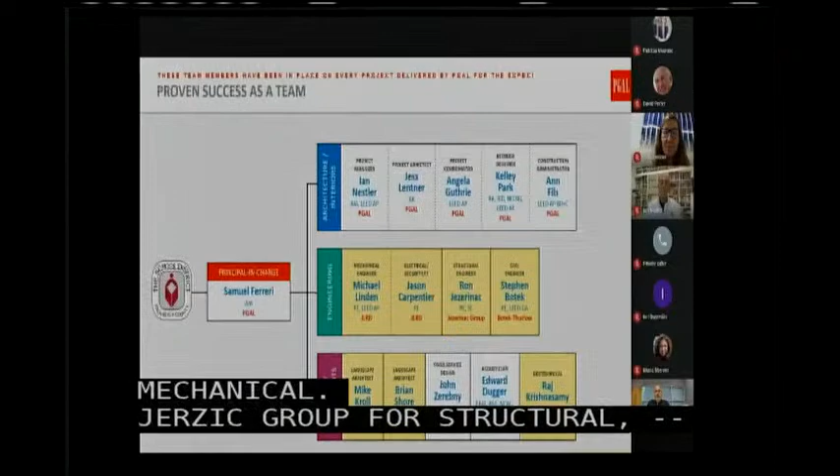The importance of this team, and I'll introduce their names in a second, is that it's the same team that's coming off of the Addison Mizner project, and we'll tell you a little bit more how similar that project is. We've got JLRD for mechanical, Jezerinac Group for structural, Botek Thurlow for civil, Miller Lake for landscape, Jack's Design for kitchen, Ed Dugger and Associates for acoustical, and geotechnical is Tierra, South Florida.

So from our standpoint, we try to stay on top of the educational trends, and we see 4 big things in elementary education that are changing. First of all, we know the future will bring change, and it's going to be designed for flexibility, and we're going to talk a little bit more about that.

Number 2 is student safety, reorganizing the existing Grove Park and planning the school for the utmost safety of students and staff. We also know that students today learn differently. They're digital natives. They come to school with computer skills that myself and others on the selection committee probably never had the opportunity to have. And finally, the pandemic and post-pandemic, how will it impact student interaction?

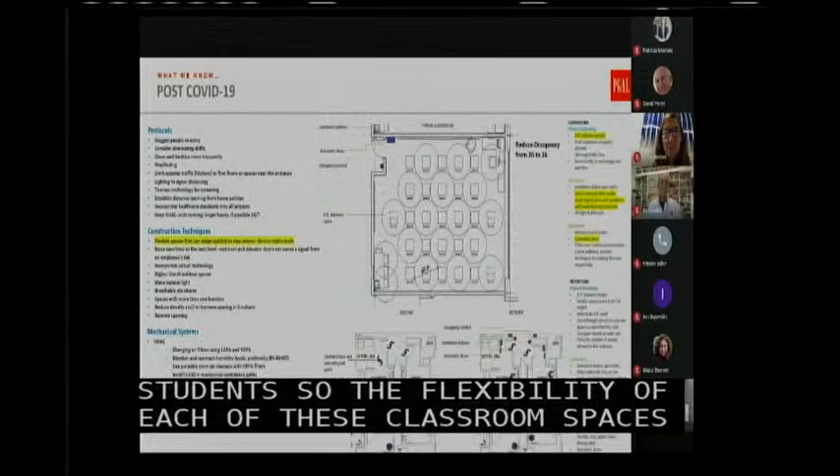Then there's the circulation spaces, the restrooms — how do you basically social distance in all the spaces in the school? And then down to sanitation and also operationally, the mechanical systems, the filtration systems. Those are all things that we know you are doing, but we need to make sure that we do the best job in the design to make those work well.

So now Jess, our project architect, is going to talk a little bit about opportunities and constraints in your existing site.

Hello, everyone. After reviewing all the data that you provided us with, we created this diagram showing some of the opportunities and constraints that we see as being the most impactful on the school campus modernization project.

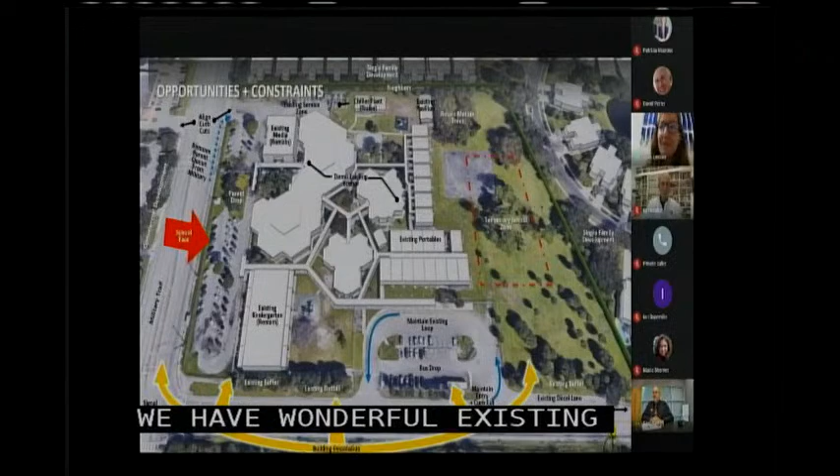First is the neighborhood surroundings. We have a great opportunity to provide a defining Grove Park Elementary face to Military Trail and a dynamic secondary face to Investment Lane. We have some wonderful existing trees and could improve our perimeter buffers to provide a safe and secure campus that's friendly to the community, to the city, and to the densely sited residential neighbors.

Second, the Castaldi analysis. We have the existing media center and kindergarten classroom buildings slated to remain, which we feel could be very strong starts to a modernized design, and we'll present our thoughts on that in a few slides. We also see the potential to work with the Department of Education to open up our site usage and get approval for those buildings to be removed.

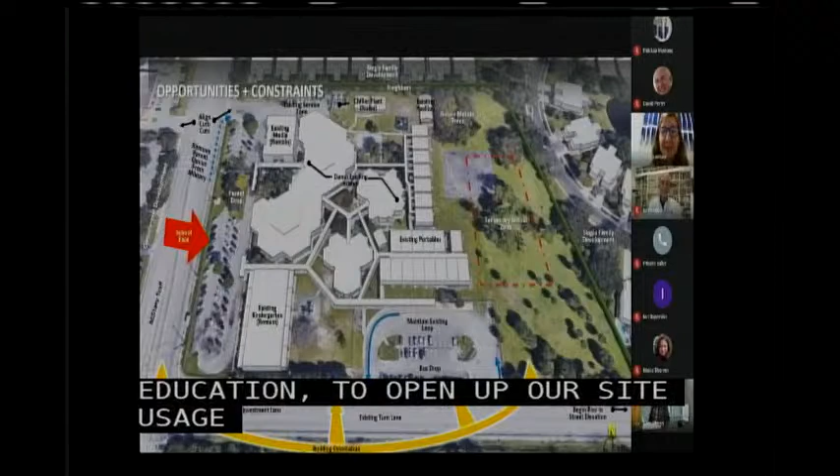On Addison Mizner, our Castaldi process lasted 3 months' time, during which I spearheaded 2 simultaneous design approaches — one keeping the existing structures and one where all would be demolished. We were ultimately able to deliver the construction documents for a fully modernized campus on schedule, and we're confident that we could provide that level of service to the district again for Grove Park.

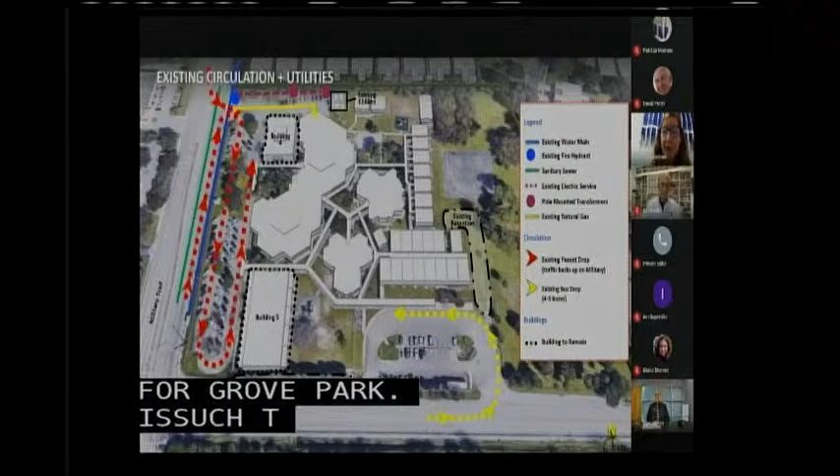Finally, an opportunity to move to a holding school off-site — should that become unavailable, our analysis suggests that the site could support supplementation of the existing portables such that students could remain on campus, with the added benefit that the existing traffic patterns could be greatly improved.

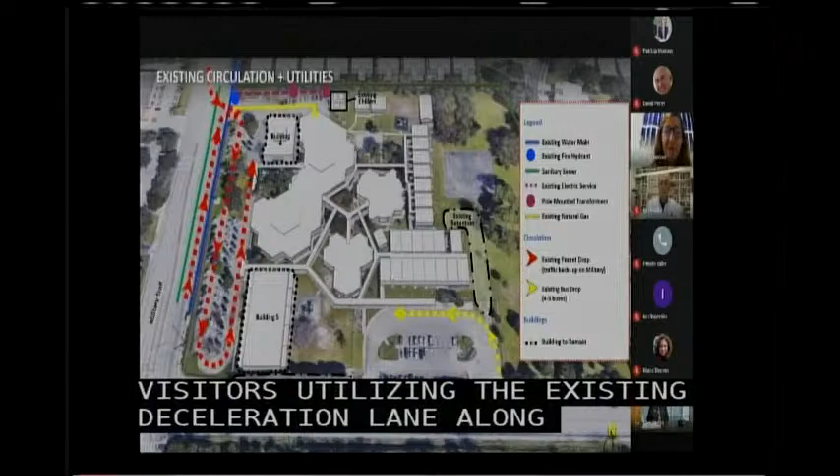Currently, the buses drop off at Investment and parents at Military, resulting in some off-site traffic issues compounded by the intersection. We would like to propose accommodating the 4 to 5 school buses on a service drive up by the Northwest via Military, with parents and visitors utilizing the existing deceleration lane along Investment, along with smarter, more efficient building layout to completely alleviate the traffic buildup and transition to completely on-site stacking.

And this coincides well with our intent to orient the new buildings with canopy and courtyards to minimize heat gain to classrooms and to common spaces.

For the utilities, the majority of the existing services and easements are coming in off of the northwest corner. We would improve the service area and chiller yards to minimize the impact on those neighboring residents to the north and improve accessibility for emergency responders.

Additionally, we would be able to work with the existing portable and relocatable utility connections such that adequate service would be provided should an on-site holding school be required.

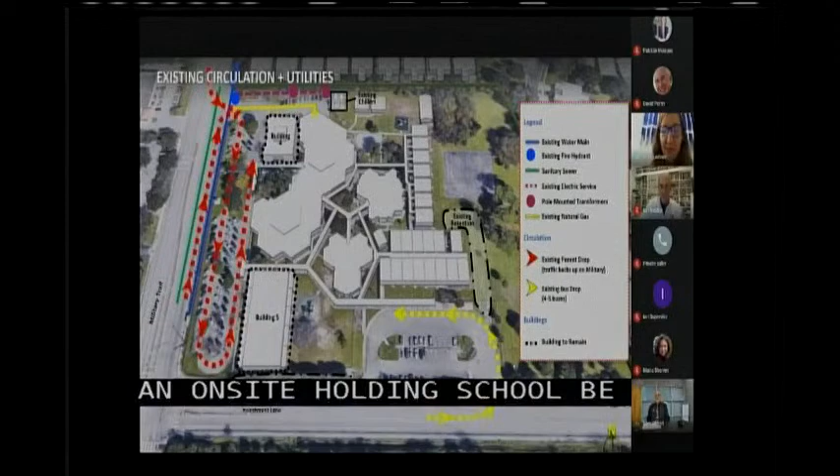And now Ian Nestler, as the project manager, will present on the specifics of the design.

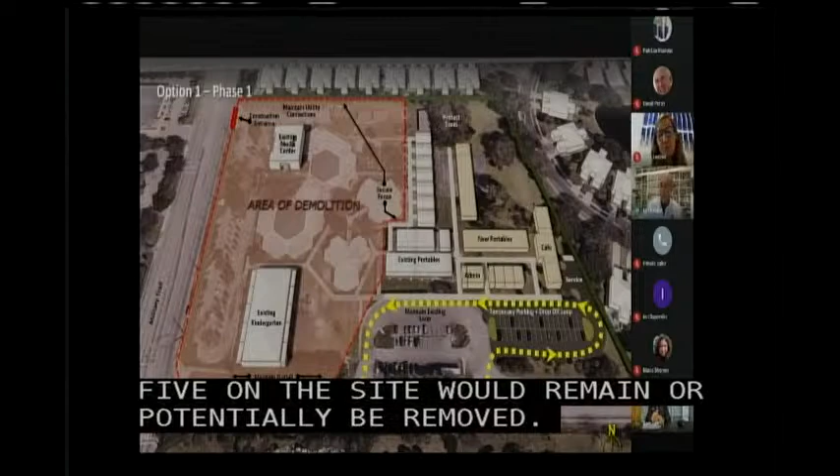As Jess mentioned, we just came off Addison, where we went through a dual path for quite a while while Castaldi was being done. We wanted to look at the best and worst case scenarios, whether the existing media center and kindergarten, buildings 4 and 5 on the site, would remain or could potentially be removed. In the first case, we're looking at two different options: one where they'd remain, one where they'd be removed.

This gives you a sense of our process, not necessarily the final results, but we wanted to take you through it. Each option would have a few phases: the first summer of work, construction during the school year, and the final phase during the last summer to open up.

In phase one, we would have demolition. We could bring in a new portable component to supplement the existing portables on campus so you don't have to go off-site for a holding school. We can put temporary parking and a drop-off loop in place to accommodate circulation needed during construction. The construction entrance would be up on Military, and we'd maintain all utility connections, extending those as necessary for the new school.

In the second phase, we would construct the new school, renovate the existing media center and kindergarten, and add a cafeteria and the administration components, while keeping a secure and safe fence line between construction activities and the portable school operating during that period. All circulation would happen on Investment Lane at that point.

In the final phase, we would remove the portables and reconfigure the final parking lot to provide the parking necessary for the campus, including the required 75 spaces - we're showing 80 spaces here. 975 linear feet is required for queuing; in this case we're showing 1,000 feet, a little over. Retention of about 1.5 acres is necessary, and we have that shown with plenty of room for the play field, play courts, and covered play area.

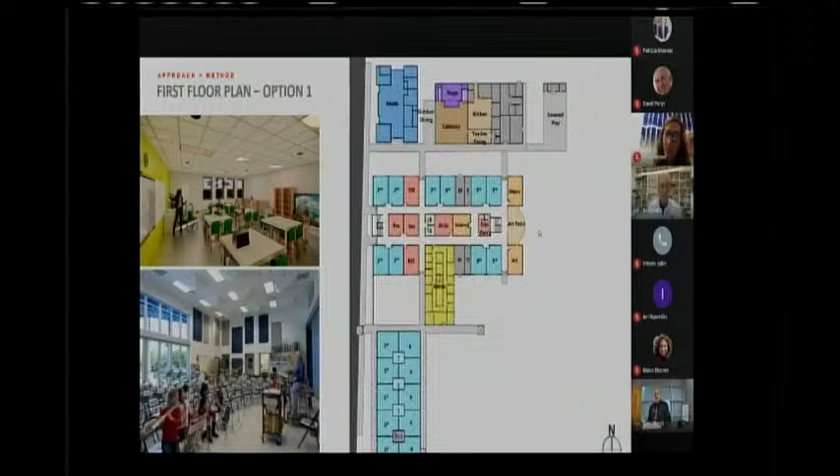A view from the second floor plan stacks on the first. You can see on the left some images of the spaces we'd be creating within the building.

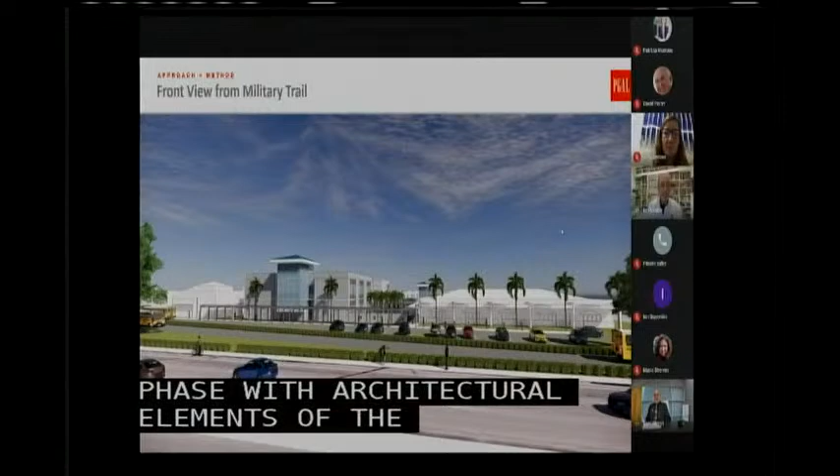Then a view from Military Trail back at the new school. The existing buildings are in white on the right and the left, and the new construction is in the center, providing a wonderful face. We've taken architectural elements of the existing buildings, which is the low sloped hip roof, and used that as a tower element, both on the main entry feature to the new building, as well as towers that signify where the admin is.

Then the next option would be if we were able to get Castaldi to agree with our thinking that maybe the media center and kindergarten building should come down. As Jess mentioned, we had done this with a dual or simultaneous path of design for both options, and we kept both options going until we received the final word on the Castaldi and were able to go in a final direction.

So in this case, we would take down all the buildings on the site. The new portable component would be the same, and the new loop and drop-off would be the same for phase one. For phase two, we would then construct the new school.

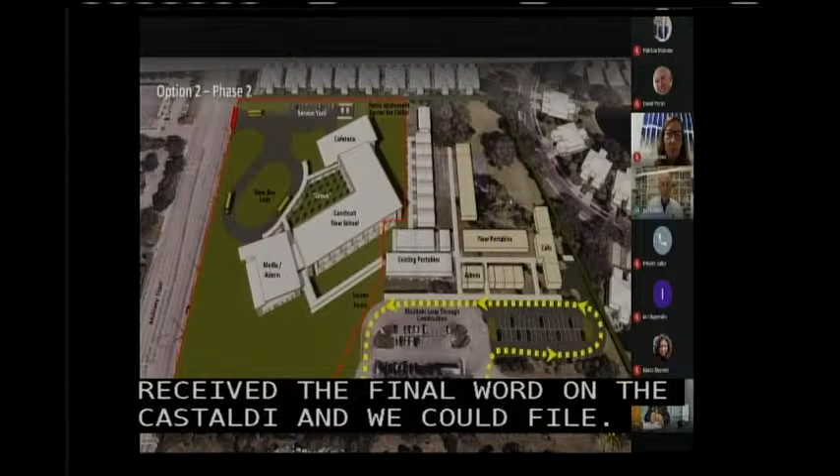In this particular case, because we've removed the existing media center and kindergarten and those buildings, we're able to provide a much more compact, efficient, and secure layout for the school, providing a little more open space to the south. Here we were defining the potential for maybe a grove park, or a grove of trees in the center of a little courtyard for the school, as a gesture to the name of the campus.

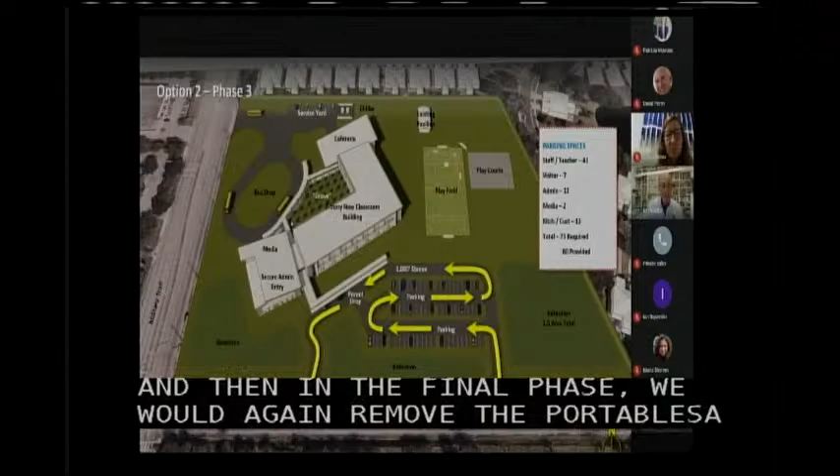And then in the final phase, we would again remove the portables, open it up, and provide the required parking—again, more than 75 spaces. Queuing in this case would be over 1,000 feet when only 975 is required. The circulation would work very well, coming in either from the bus drop or the parent drop from the south or north into a secure area where the admin is.

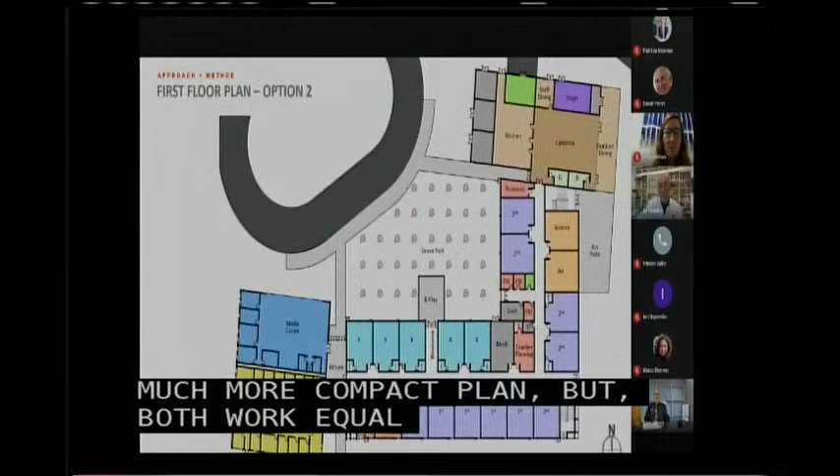And this plan, you can see, would work very well—again, a much more compact plan, but both work equally as well. We've got the correct number of classrooms for each grade on each level, basically 5 classrooms for K through 5, with the primary grades on the ground floor, and on the second floor we would have 3rd through 5th.

A view of this school would then take us, shot here again from Military looking back. You can see the grove of trees there in the middle behind the bus loop, and the media center off to the right, with the 2-story classroom building in the center.

And now I'd like to speak a little bit about the schedule and then pass it off on the budget. So the schedule would be basically the same for both school constructions. Our intent would be to accelerate our activities during the design and documentation phases to be complete in June of 2021.

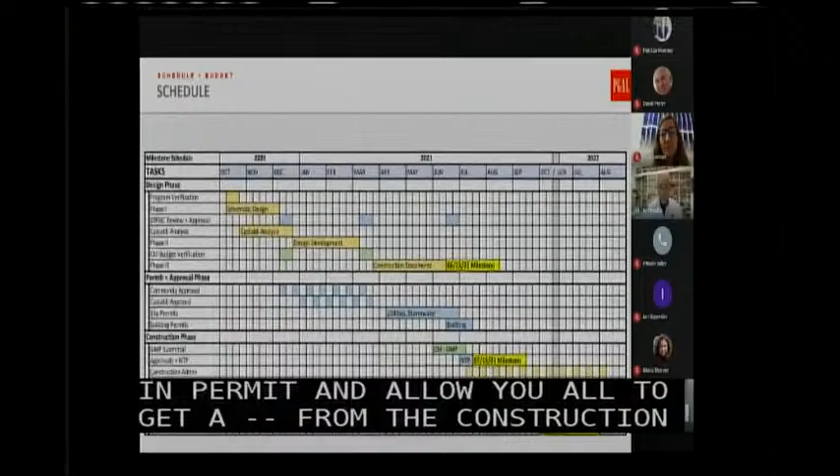And that would allow us to get in for permit and allow you all to get a GMP from the construction manager and actually start site work in June and go start construction in July. So you can see a milestone there of 6/15 for us to be done and 7/15 for you—or the CM—to start construction on the site.

We'd have a full 13 months for construction, with the first summer being the demo and getting the portables in place. The construction could take place very simply, and then you'd be in a position to open up easily during the second summer, with punch out, close out, and commissioning by 8/15 of '22.

So that only allows us to do a combined two-path design during the design development and schematic design phases, as you can see with the Castaldi analysis, and then 3 months of approval for that, as well as community engagement—the kind of meetings we've had on Addison Meisner would be basically a repeat of the process we just went through. It has worked out beautifully, and we're under construction with that one, and we're very excited about that.

So let me now turn it over to Sam so he can talk a little bit about the budget. Thank you, Ian. We've looked at the budget from both leaving buildings 4 and 5, and clearing the whole site. We've got relevant and basically new cost information based on the Addison Meisner GMP, which is back to May.

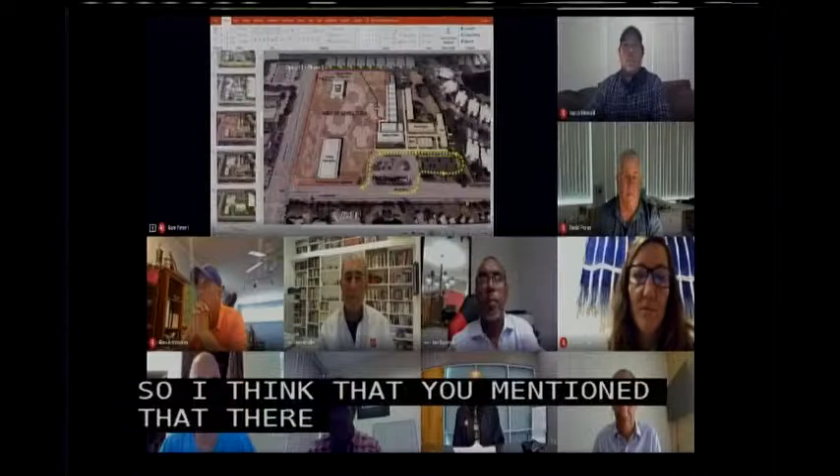Just one question with regards to the proposed plan you showed. You're going to move the vehicular access off of Military to Investment Lane, because I think you mentioned there was some traffic issues for vehicular entrance and exiting off of Military.

Investment Lane, I mean, obviously is a smaller thoroughfare, but I was wondering, with regards to a left turn lane on Investment, since it seems like maybe a two-lane structure with an interior turn lane, do you think there's enough queuing, or any issues with traffic coming from west to east to make that left turn versus traffic going east to west? Do you think there'd be a conflict that may back traffic up to Military Trail? I'm just curious, because I didn't know how many people actually drive the kids to school versus buses.

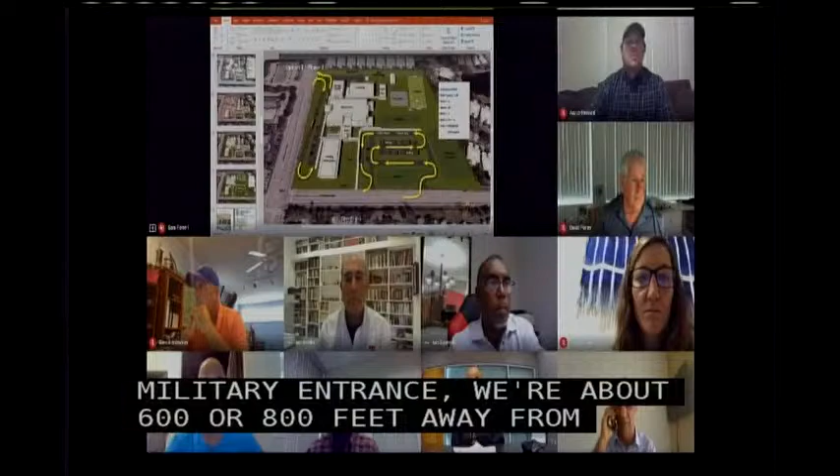Okay, so because we've been in COVID, we weren't able to go and observe for the last month, but our civil engineers have reviewed this. We believe there's adequate, well, first of all, we're getting basically all the stacking onto the site, over 1,000 feet, where right now there is no stacking from the military entrance. We're also about 600 or 800 feet away from the intersection of Military and Investment Lane. And there's also a turn lane on Investment Lane into the school, which the buses are currently using.

And it's a long turn lane. And then there's also a distance to the overpass - there's an overpass over 95 on Investment Lane. So there's a clear path. And actually, we've observed the traffic patterns, not school related, and Investment Lane is definitely not as busy a street as Military Trail. So we feel comfortable that this is a better solution, and it'll be very difficult to solve the solution on Military Trail.

We also have a staff member, our marketing coordinator, who is an alumnus of Grove Park Elementary. That was before Investment Lane was built through, but she noticed there's been a traffic problem here for years at this school, and we're hoping to solve that.

Understood. Just one other quick question. Could you put up the site plan with, I guess, those buildings - the kindergarten and media center - that if you didn't have to keep them, you could come up with a different site plan? I know there was one that was angled.

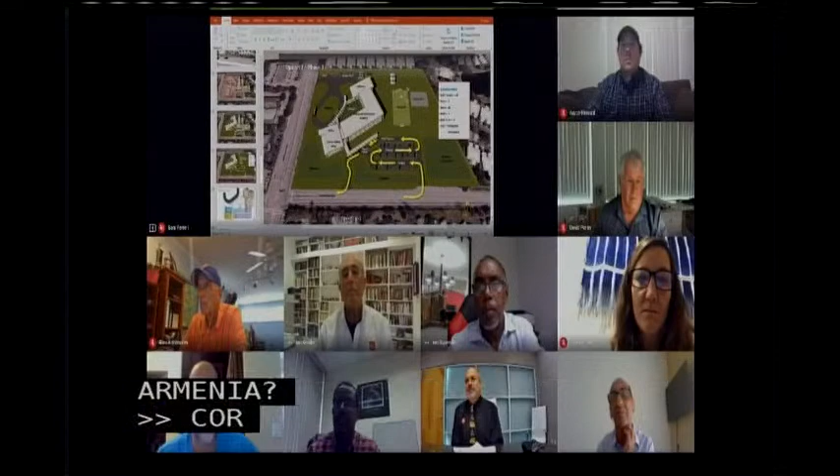Okay, this is the site plan in case you don't have to keep the kindergarten building or media center, correct? Correct, and so this becomes a much more compact building. It gives us more site to work with, so we can get further back away from Military Trail and Investment Lane, for more stacking of buses as well as parents.

The other thing, Michael, on this school is the existing buildings, the kindergarten in particular, has all exterior entries, so it's a building circled by a covered walkway. From a safety and security standpoint, we like bringing the classrooms internal and having that internal security and compactness to the school, if it is possible.

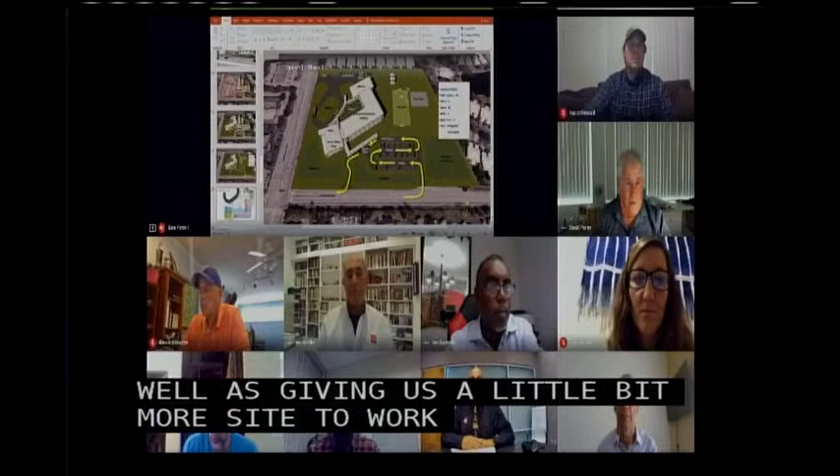That's why we showed basically supplementing the portables that we think we could build on the school. Now, if we could move the students off the site, that's going to help us with the timing, as well as giving us a little bit more site to work with, more relief in terms of getting that traffic off of either Military or Investment Lane. So that would be preferred.

But if we can't do it, we think we can make it work either way. Last question is, the existing school buildings are all one story, aren't they? Yes. So was there any consideration to trying to still work out a plan to keep things one story? Because it looks like both of your schemes go multiple story.

And again, these were just two quick looks on our behalf. Knowing that we might have to keep the kids on the site made it difficult to do a one story. The existing school is like an old pod school, and half the school is portable, so it's way more compact than, or takes up more space than a compact school.

But that's an option we could look at. We just think in terms of security, having an enclosed height two-story solution works best, and we can get all the primary grades on the first floor with all the support spaces that are needed.

Okay, thank you. That's all I have. Thanks, David. Do we have any further questions from committee members for PGAL?

Glenn? Yeah, just to expand on that a little bit, from what I'm seeing, a lot of times when we go to a two-story building, we also have less of a footprint, one roof instead of expansions of roofs and stuff.

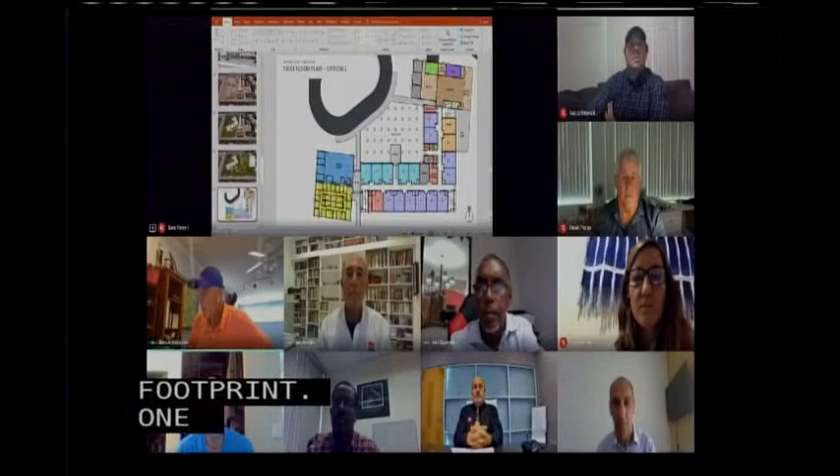Questioning back to kind of circling around where Michael had talked about, are you guys thinking that we're going to need a turn lane or deceleration lane on Military Trail for the buses, since both schemes have buses?

Well, I think I could jump in on this one, Sam. I think the number of buses, 4 to 5 buses that we've been told, is relatively small for this campus, so there may not be a need for a decel lane on Military. And that would be something that we would work out, of course, with the county, with yourselves, to make sure that we have the correct components.

But we've got lots of opportunity and lots of room once we move buses to the Military Trail side. Okay, that's all I have. Thanks, Glenn. Are there any additional questions from the committee for PGAL?

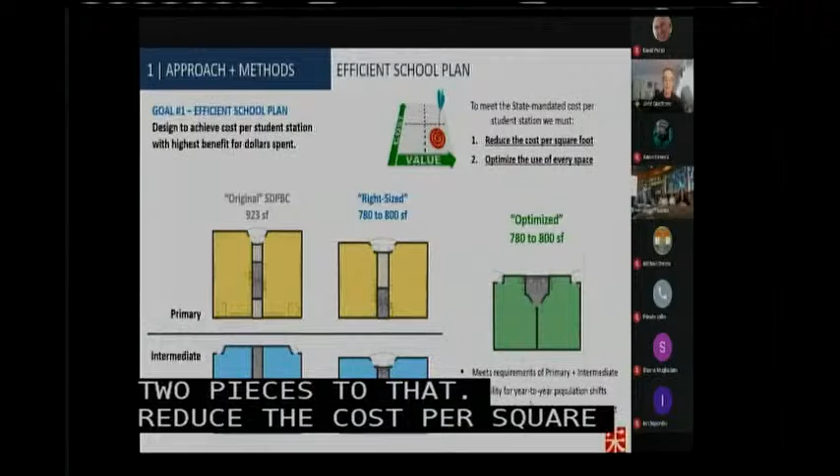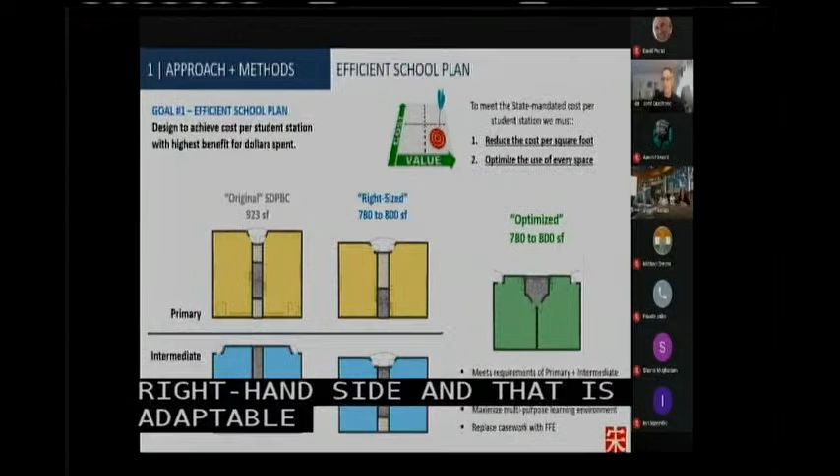We have found in building several schools now that an optimized classroom size of about 800 square feet works very well with all the furniture. We've also developed a universal bathroom configuration via this compact vestibule that you see on the right-hand side, and that is adaptable either to a primary level restroom configuration or intermediate level restroom configuration.

In terms of energy use intensity, or EUI, there are a number of ways to get there in terms of design strategies, but an average school building has an EUI of 54, and that is an energy use measurement based on a square foot basis annually.

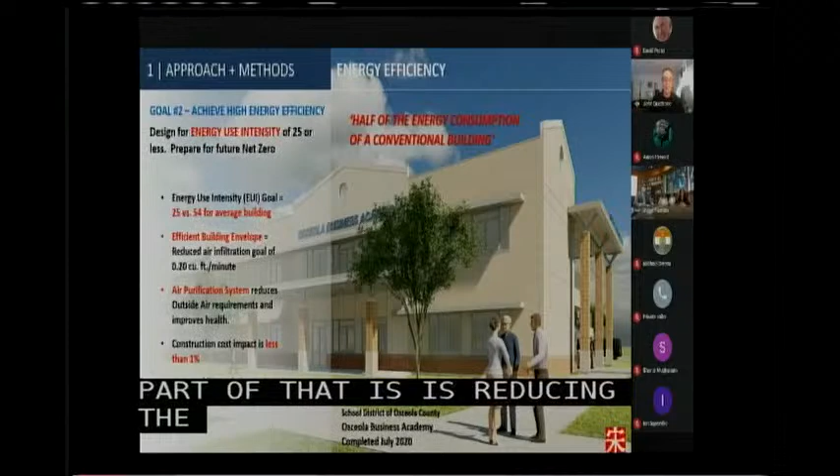We have recently designed a building that will do better than an energy use intensity of 25. Part of that is reducing the air infiltration through a very efficient building envelope, but also the type of glass, the type of insulation. So what this does is set you up in the future to go to net zero, because you've made a very efficient school.

The only component that is missing now is the photovoltaics, so you can decide to do that at some point in the future as the price of that continues to go down.

Next, as a goal, adaptability. Change is the one constant, and the school needs to be designed for flexibility. The way to do that in the classroom setting and all the instructional spaces is to have as few fixed elements and as much movable furniture as possible, so your spaces can truly be multi-use so that you can achieve social distancing within the classroom.

And we know that new products continue to roll out in response to this, including the image you see there of outdoor hand sanitizer stations.

Next, prioritizing security and safety for a functional, safe, and secure campus. We understand that this campus, Grove Park, has a very high percentage of walkers, which we need to prioritize, having safe pedestrian paths throughout the campus and arrival to the campus for those.

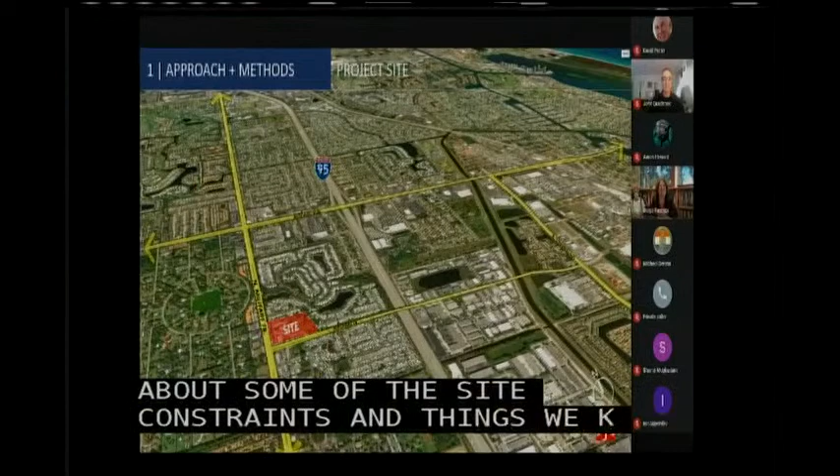We're going to talk next about some of the site constraints. This is giving you an overview of the site in red, with Military Trail to the west and Investment Lane to the south. Analyzing the existing school and its current function, we can see the primary pedestrian paths of the students would be from the west, crossing the road and coming from the north and south on Military Trail into the site.

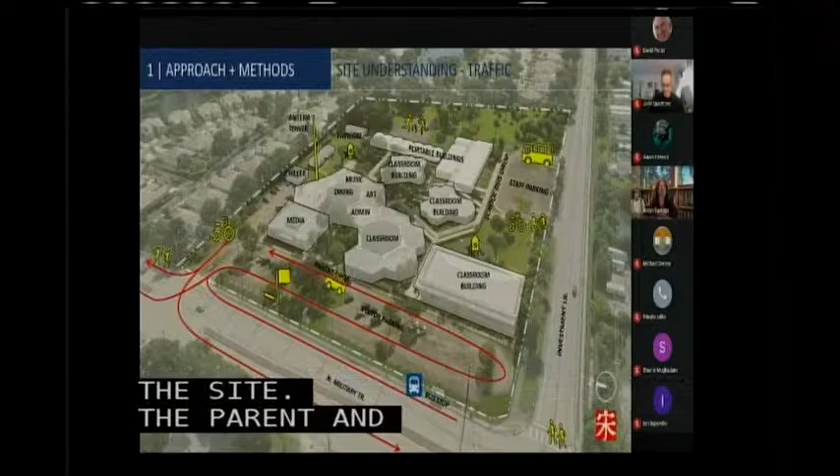The parent and visitor parking loop is currently along Military Trail, and this is somewhat problematic. We do know there's the possibility of a deceleration right turn lane needing to be added along North Military Trail to accommodate that stacking—it's currently not functioning efficiently in that way. The bus drop off is currently off of Investment Lane to the south.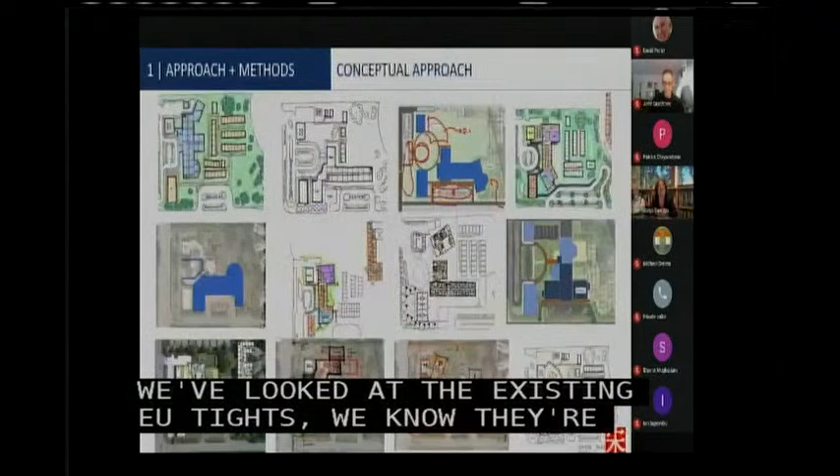We also have delivery to the cafeteria and dining, which is happening at the north end. And we've looked at the existing utilities. We know that they're mostly coming from the north property line with the lift station and water meters in that location. So as we started going through the possible design approaches, we engaged in conversations with our consultants, including our MEP team, our civil engineers, and our traffic engineering, which was key in developing the options you can see on the screen, and developing our final two options that we're going to present momentarily.

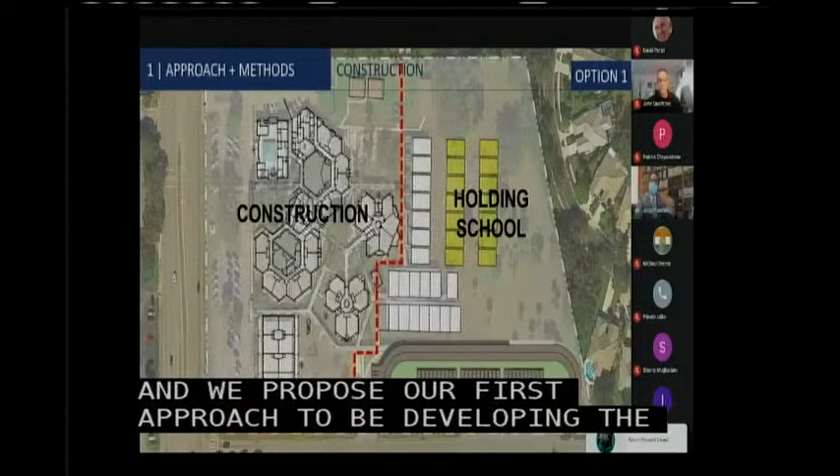So we know our site, we know the existing buildings, and based on this, we proposed our first approach to be developing the holding school as a phase one. That includes the parent drop-off circulation that we are proposing to be changed into the investment lane south of the building. We decided this upon some conversations with our traffic engineer as the best way to relieve the traffic congesting the military trail, and then moving what will be the bus drop-off and staff parking down to the west side of the campus.

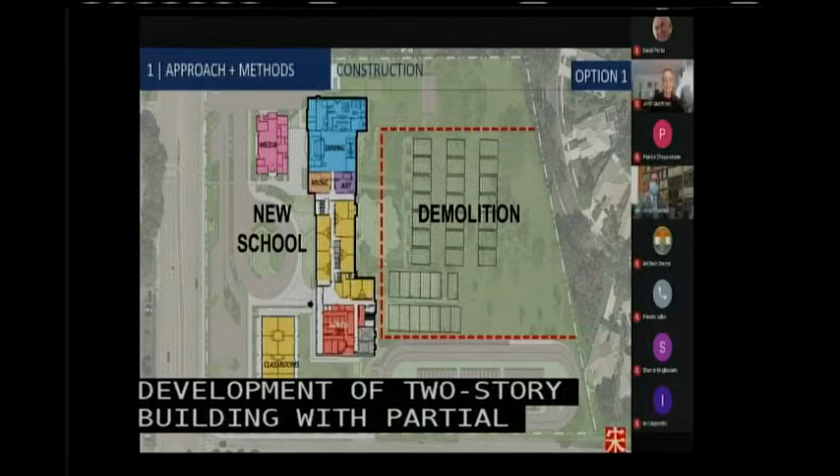After our site is done, our first option proposes the development of a two-story building with a partial one-story area north of the site where the dining, music, and art classrooms will be located. As we know, the budget is a key element. We have proposed to keep the media and classrooms under this option to remain as is, with minor renovations to bring them up to date, including HVAC renovations, some lighting, and some miscellaneous renovations throughout the buildings for this option.

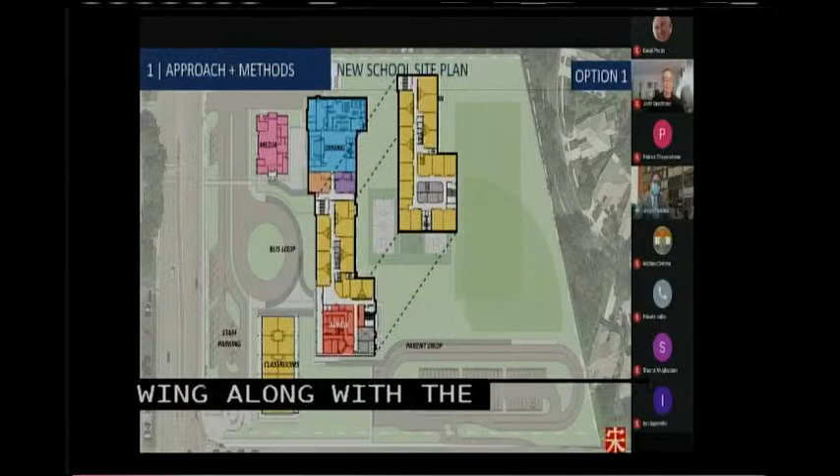When moving into the two-story portion of the building, as you will see on the screen, basically it's the classroom wing along with the administration area down south. Basically what this does is propose an approach that condenses the building and proposes an efficient circulation throughout the building with close monitoring of the admin staff.

In regards to the site, and this is something you will see in both approaches, we are proposing parent drop-off at the south investment lane with the existing deceleration lane, which will actually help the off-site stacking, but we're increasing and bettering the conditions of the on-site stacking by moving almost all of the parents and cars into the site and avoiding further conflicts on the investment lane and/or military road. Then on the west side of the campus, we're proposing a bus loop up to the district standards along with staff parking on that west side of the campus.

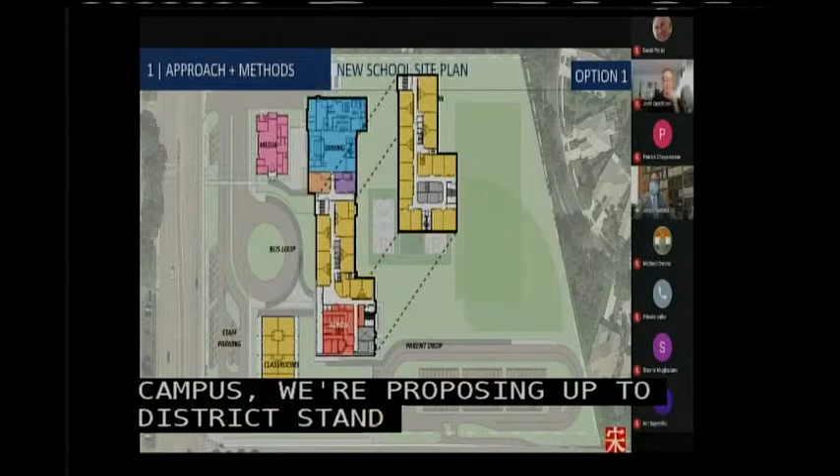One important thing, as Jill mentioned, is the amount of walkers and the pedestrian circulation on the site. Because of that, we're proposing celebrating that corner, that intersection between military and investment, with an entry courtyard for pedestrian access that will connect to the entry zone of the schools and the point of entry on the administration. That's besides the already existing accesses from investment lanes that will also connect to that parent drop-off area.

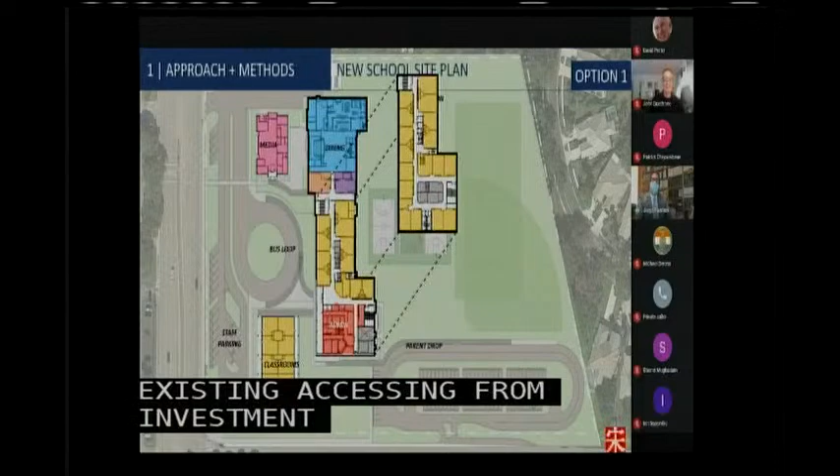So this two-story option, and something you will see similarly on the other one-story option we're going to present, is basically a 63,000 square foot building, which is what we found was doable under the budget that we have for the project. So we're meeting the amount of classrooms needed, and we're meeting the budget the district currently has by first adding the building and bettering the condition of the existing two buildings to remain.

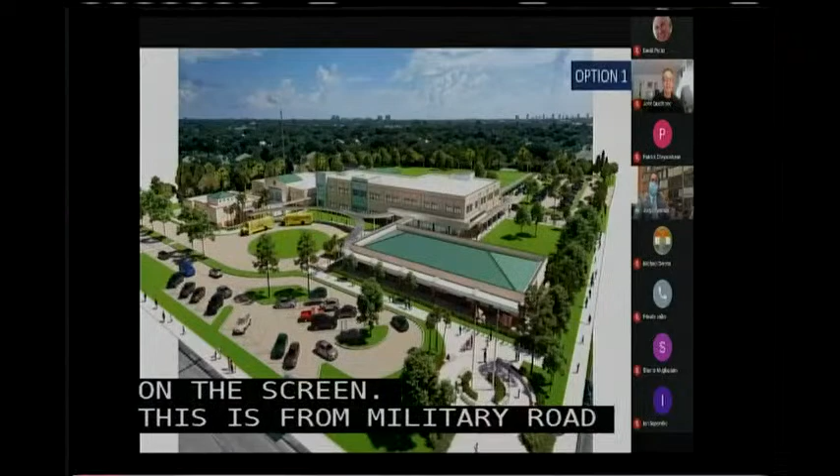Now, moving into the second option, we felt we needed another type of approach that gives you an opportunity to explore the site in a different way. Based on that, going into the holding school portion of the work, we're proposing a phase one construction of the parent drop-off area that will later serve the school, and then having the holding school at the east side of the property.

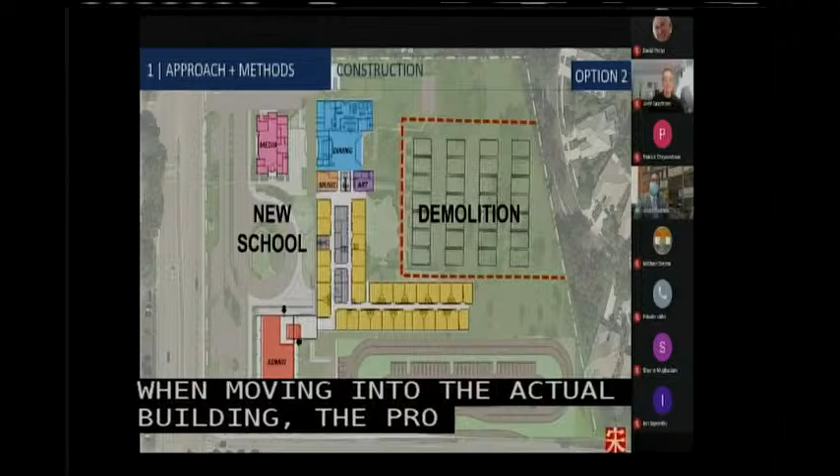When moving into the actual building, the proposed option is a one-story building. As you can see, it works similarly to the other options, but I'll go through the details. The difference is that it's a one-story building that extends further to the east side of the property.

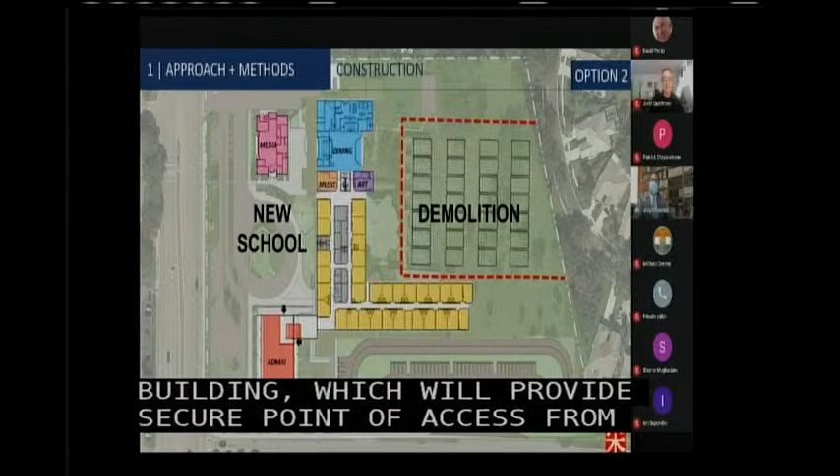Basically, we're putting some limits on that area northeast of the building and securing that for proposed sports areas as well as exterior courtyards for students. One other thing we did in option 2 is propose that the existing building 5, on the south portion, be changed into the administration building, which will provide a secure point of access from both the bus loop and the parent drop-off that will later lead to a lobby connecting to the classroom wing, all through interior spaces.

It's important to say that this option is interchangeable with option 1 — the possibility of having this building renovated to fit this program and have it used as an admin area.

Again, in terms of the program, the north portion of the building will be the dining areas, music and arts. Important to mention is the relationship this creates between the dining and the media, with an exterior courtyard they could use not only for students, but if the school decides to engage, possibly for public use, performances, and so on. All of this will be enclosed within the building's limits, so it will be a secure access.

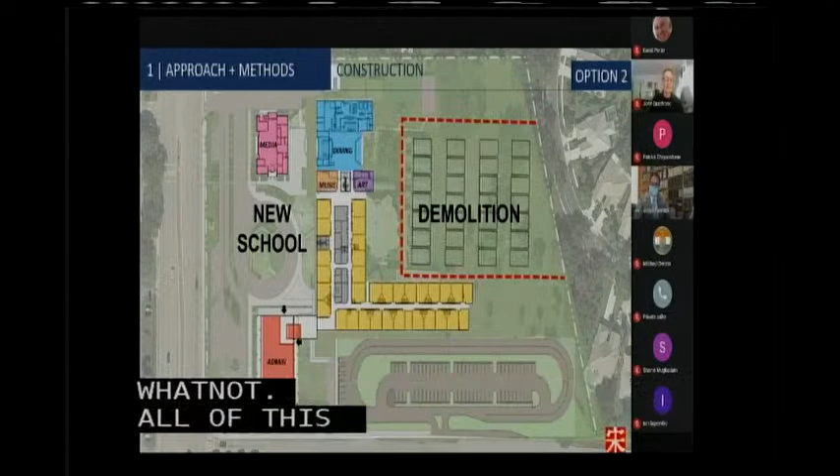Then on the back of the campus, after demolition of the portables, we'll have the sports areas along with some exterior courtyards for students to use. So basically this sums up our option 2.

Here's a view of how that might work within the site and how that might look. We feel we're creating better circulation for the parents, better circulation for the way the buses and staff engage within the site. And very importantly, we're engaging the pedestrian accesses through the development of the courtyard at the intersection between Investment and Military Road. Here are some additional views — this will be from the bus loop to that secure point of entry.

Now moving into the schedule and budget, I'm going to leave you guys with Lila.

Hi everyone. What we did was base a schedule on the dates provided in the RFP, the need for an on-site holding school, and a September board approval. Of course these dates can change and be tweaked, but based on these assumptions we created this schedule, which makes the design package broken up into 3 submission packages.

We'll break it up into phase 1, which would comprise the holding school, that partial site, the development of the parking lot on the south side, and the demolition package for the existing building. This would also allow us to get 2 GMPs for this process, because we would also require a demolition package for phase 2, the new and renovation components.

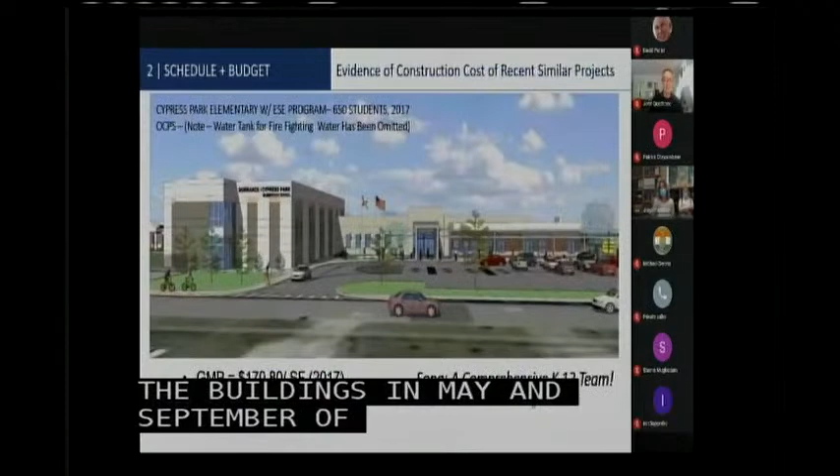So now moving into the budget, we used a few comparables of projects we've done more recently. For example, Cypress Park Elementary School in Orange County, which will be our base for comparison. Similarly, we got some information from our Michigan Avenue Elementary School. The first one was close to our 650 stations; this one has a few more stations, but we came up with the cost per square foot suitable for our project.

As you can see on the screen for our budget, the first option is the comparable. We ended up with Cypress Park at $171 per square foot, but since time has passed, we added an additional 20% for yearly escalation and the location factor for South Florida, which ended up being approximately $205 per square foot. Now, when it comes to our actual project...

Excuse me, Jorge? Yes.

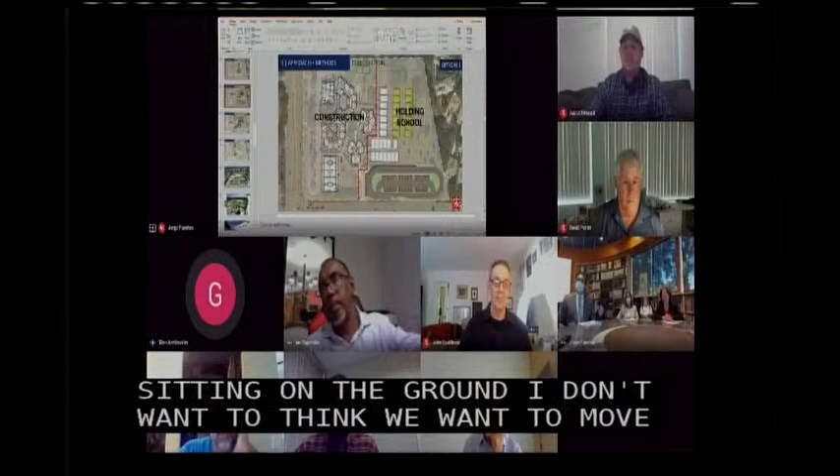Hi, Jill. Hi. I had questions - if you guys can pull up the first rendition that you had up, which I think included leaving the portables as is. My big question is that if we have to keep this as a holding school, which I'm hoping we don't, but if we have to keep this as a holding school and we need to keep costs down, existing portables sitting on ground - I don't want to think that we really want to move those around prior to any construction happening. So your first approach left everything intact, but I think your second approach kind of moves those portables around, which once again adds added cost to us. Am I right in what I was looking at?

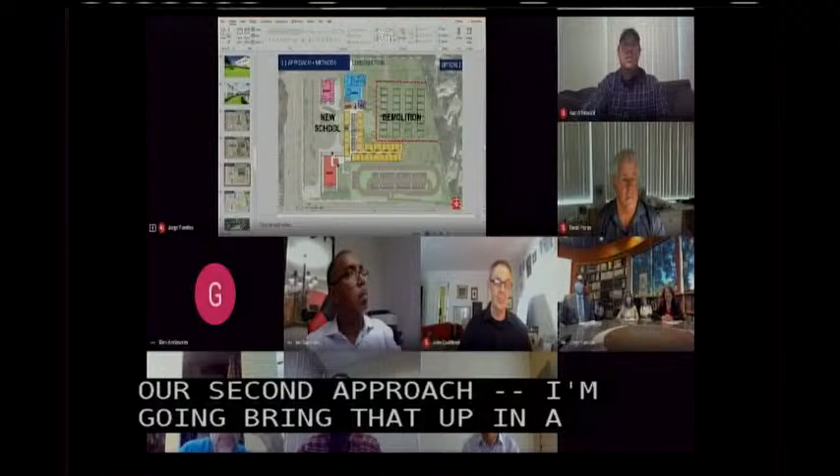Yeah, Glenn, good point. Basically, on our first approach, we do keep all the portables in place and then add the required additional portables for the holding school that's coming into the site, or not. Then our second approach - and I'm going to bring that up to the screen in a minute - it does remove the existing portables at the south. It keeps only one of the lines of portables. One of the reasons we developed this first is because we think this engages the site in different ways than the first option, and there's the possibility of the holding school to be or not to be within the site. So we felt it important to explore not only the capacities of the site, but to give you maybe an option that if the holding school does end up being outside our site, that we have something that can better respond to the site where it belongs.

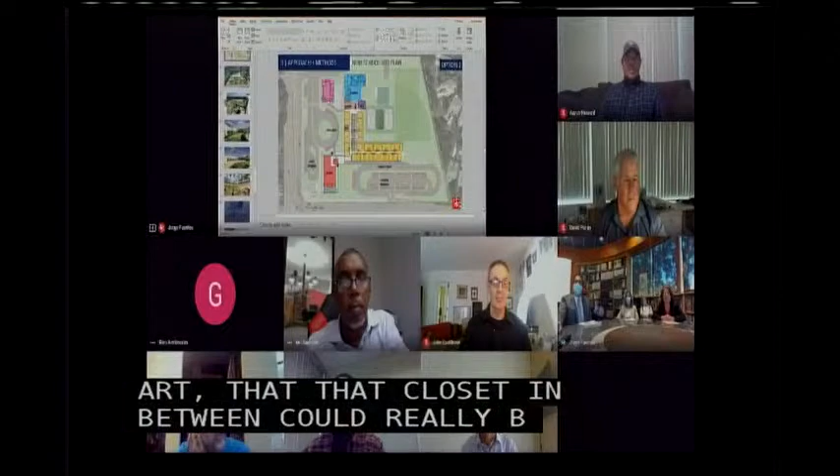Okay. And while you got that one up, I like the fact that you got the admin building over there because that becomes more of a single point of access - the buses coming in, the parents coming in and stuff like that. The only thing I don't really like about it is the media center's kind of sitting out there all by itself, not connected to anything. But that could work in our favor, but as far as students go, to me, it's not a real good option. So we envision actually engaging the media center with the dining and also music and art - that plaza in between could really be developed as a really usable outdoor space serving both media as well as cafeteria, and music and art could flow out into that as well.

As needed. Yeah, I like the plaza. It's just the connectivity of that building sitting out there by itself. Everything else is going to be undercover, but that's the only building we'd have to go outside of. But I like portions of it, just having that building out there is a little scary to me.

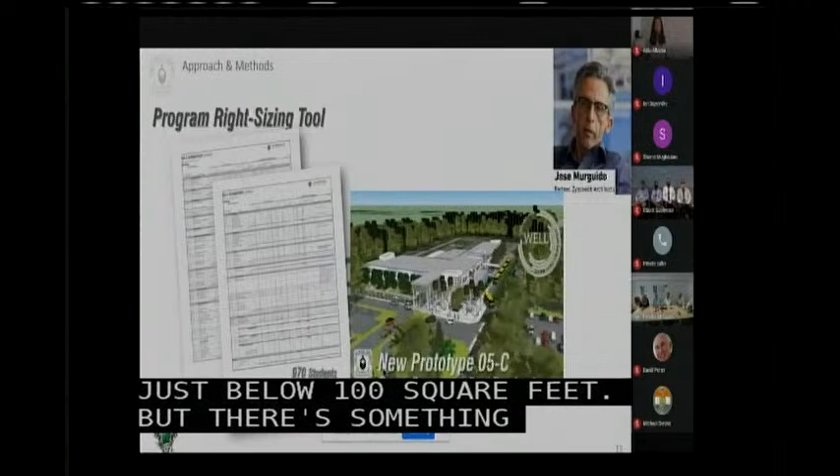And finding that right balance is something we've been working on for the last 4 months with the district, and in fact our partner on that project is Morse Elementary 05C in Boca Raton. That also has a very, very small site, but it has the very same challenges, and we have the building program just below 100 square feet. But there's something remarkable in that building, which is that it's actually a scaled copy of what we need for Grove Park. When we program Grove Park, it's 100 square feet per student.

Just under 65,000 square feet, it's only the first two stories of the prototype 05C. So it sets us up with a running start on that particular project and a quick transformation.

Also, 05C has enhanced mechanical systems. We're setting it up as one of the first well buildings, which is important when you're trying to bring parents back to a school that has been under-enrolled.

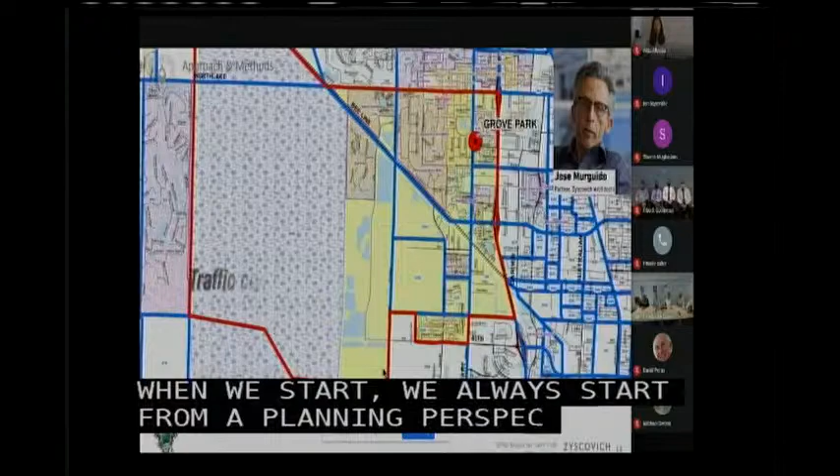So when we start, we always start from a planning perspective and look at the big picture and where the kids are coming from. This is the attendance boundaries. Of course, they're coming from the southwest, which means that as we look at the traffic on the site, that signal at Military Trail is absolutely imperative to the circulation of the school.

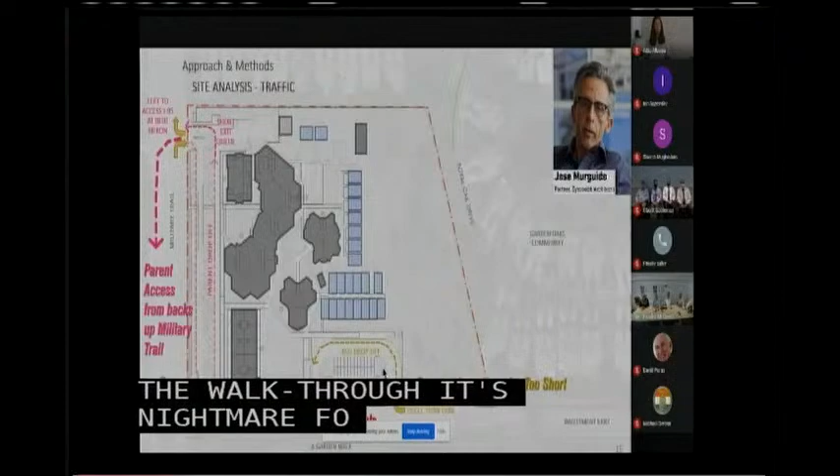Right now the drop-off is at the front. It has a minor queue on one side, and as Glenn reminded us on the walkthrough, it's a nightmare for parents on Military Trail. So that's a hurdle that we're going to have to deal with. And of course, the bus queue is somewhat compressed in there.

As far as utilities are concerned, we have adequate utilities, but there's a major overhead power line on Military Trail that will be a consideration as we plan this project. We're grateful for the wonderful buffer to the east of the school that provides a good buffer with the community. There's also a low spot here, which is something to consider for both portables and any expansion. So when you add it all together, it's a tiny site.

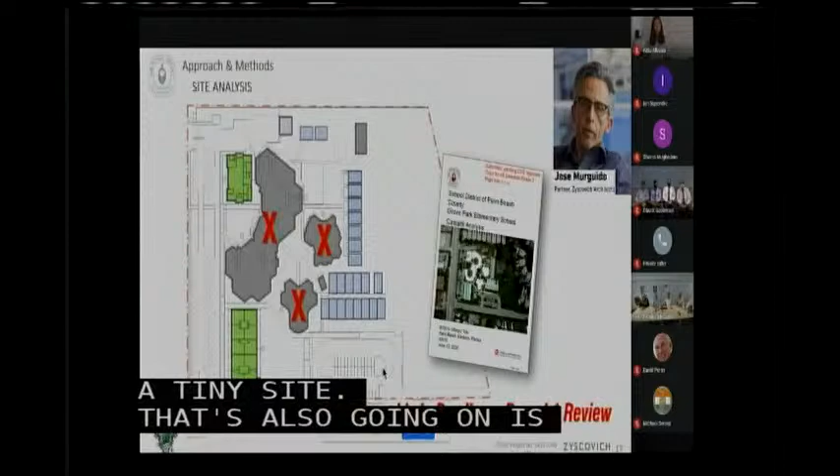There's an ongoing Castaldi, as we know, and it's in round one. Many of us know that Castaldis are documents that require a little negotiation. We've got multiple rounds that go around, and we've done many of these ourselves.

But as we walk the Castaldi, which was recommending demolition of all the buildings there, there are a few buildings that are questionable, primarily buildings 4 and 5, the library and the classroom building to the south. So our approaches are going to take these two things into account.

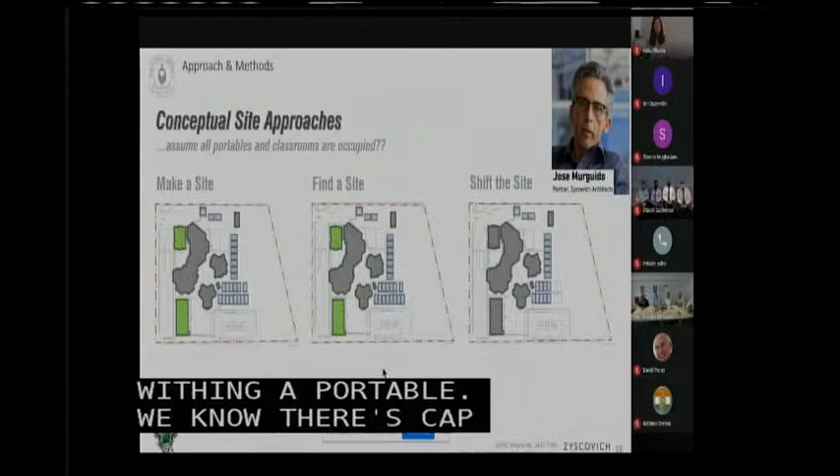As we looked at our approach to the building, we basically had three approaches that we considered, and one we discounted. The assumption common to all of them is anything we're displacing, we're replacing with a portable. We know there's capacity on this campus since its enrollment is about 500, and there's over 1,000 satisfactory student stations there. But for the purpose of today, we're looking at replacing anything that we displace.

So make a site is our first approach: if we demolish the existing building, we basically have to do a replacement campus. It takes steps of putting in the replacement campus, building the new building, and then tearing down the replacement campus.

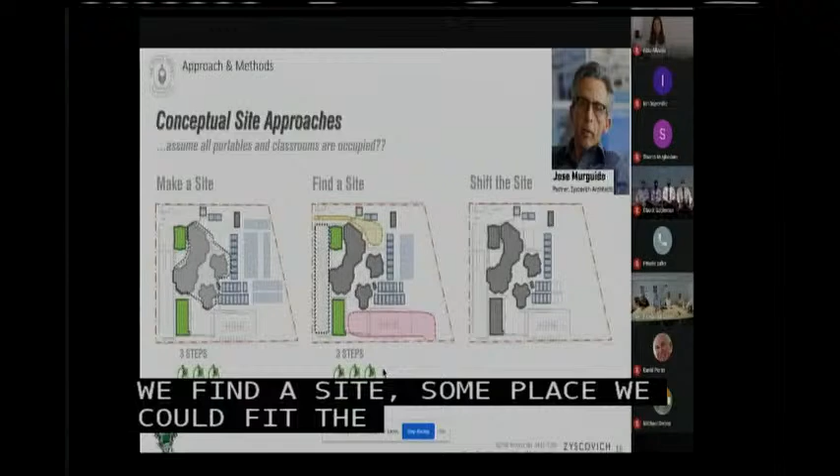Three steps, takes time. The other approach is perhaps we find a site somewhere we could fit the building in that allows a reduction in the number of portables, because portables are a sunk cost. After you use them, they don't contribute to the education of the school, it's simply a staging area.

And then finally there's the shifting of the site. Perhaps there's a way of reducing the number of steps on this project and leaving it at only two steps. So we're going to look at these two options and test them out. As you know, this is one of many options we work with you guys on, and your participation will shape these.

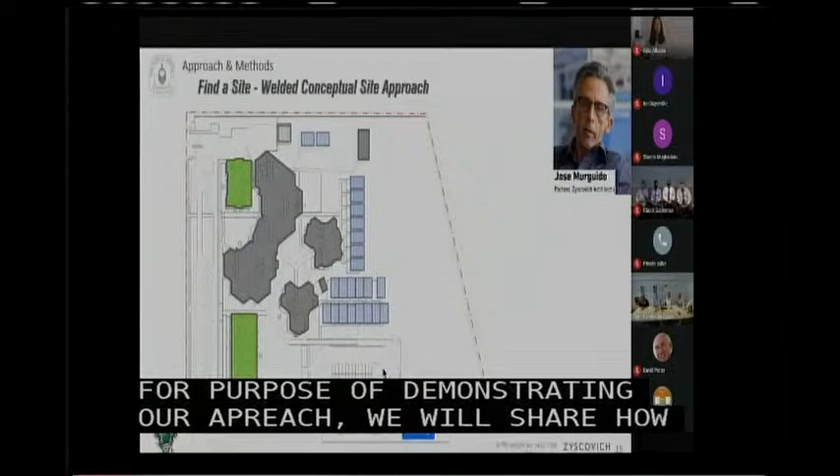For the purpose of demonstrating our approach, we're going to share how we'd approach this: finding a site, we call this our welded concept. We're going to set up portables to displace what's going on in buildings 4 and 5, the library component and the classrooms that are there. We'll build a bus loop and a parent drop-off, because the reason for that is we're going to weld a building to those existing buildings off the front.

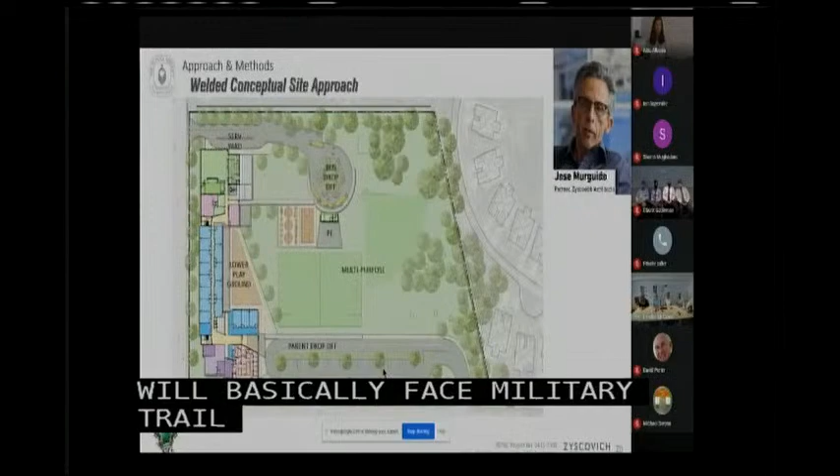It'll be a bar building that would basically face Military Trail and would create a park to the south. There'd be a long extended parent drop-off loop with about 950 linear feet and an extended bus drop-off to the north area.

This is precisely what we did at Seminole County when we did Hamilton Elementary School, and we were able to renovate the existing buildings. We would take the media center and renovate that into a kitchen/back of house, and then build buildings 5 into an admin and classroom building, and the rest of the program would be in a 2-story bar building facing Military and providing a covered walk off a lower playground area.

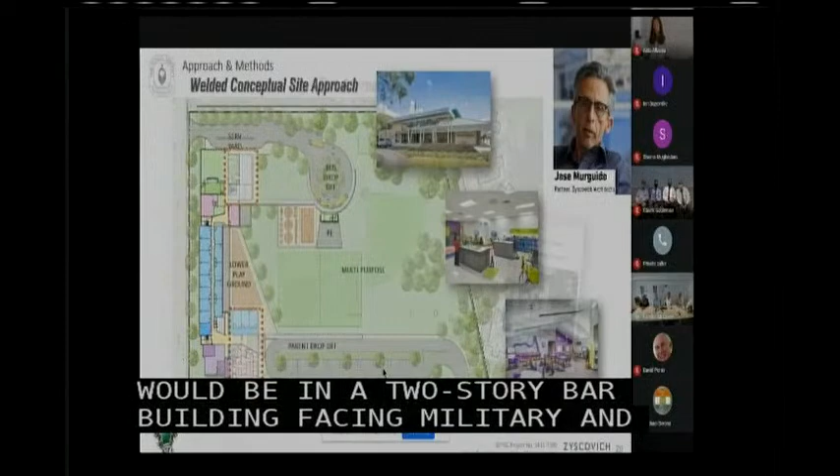The Castaldi that we were looking at, as we studied that within this option, we had to drill a little bit more into detail on it. We realized that there's some major costs that perhaps could have been highlighted there and would have made the evaluation of those buildings perhaps go a different direction.

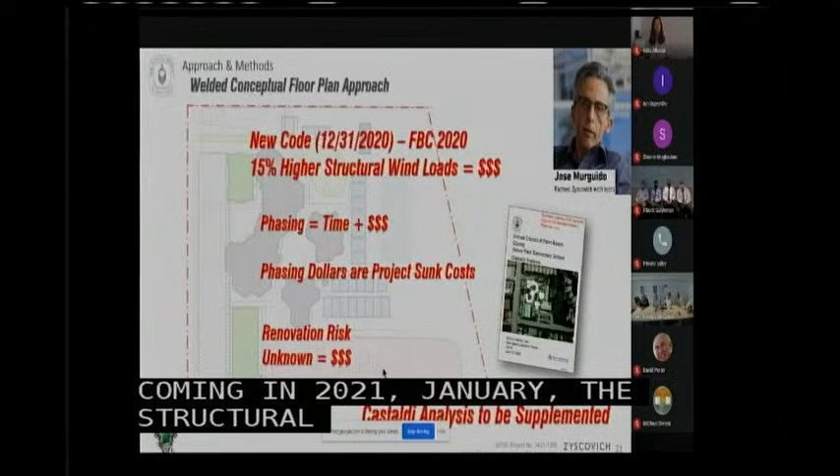And we think there's opportunities to supplement that. We all know that there's a new code coming in 2021, January. The structural components of that, and Ida can attest to this, will be 15% higher. So those costs are going to have a burden on any of the future improvements of those buildings. Phasing as well, and the disruption that is putting to the campus, especially in a campus that's struggling to maintain its enrollment. And those dollars in phasing are sunk costs.

And then, of course, we all know that many times when we complete renovations, we wish we would have rebuilt the thing because of all those unknowns that you discover as you're going through that. So that led us to basically a shifting site.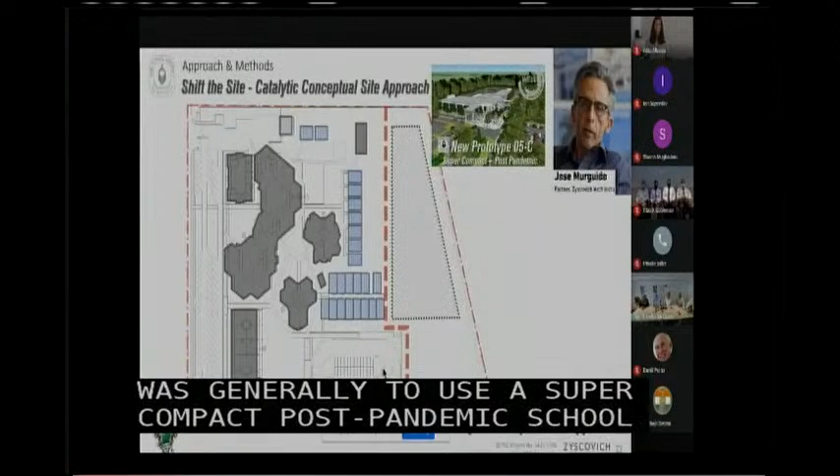The shift was generally to use a super compact post-pandemic school that I had mentioned in the beginning that we had just programmed. This is a tiny footprint site because the 05C site has many of the same parameters as this site. So as we look at the existing campus now, what we would do is basically designate an area to the east where we would be able to build a new building and require no new portables.

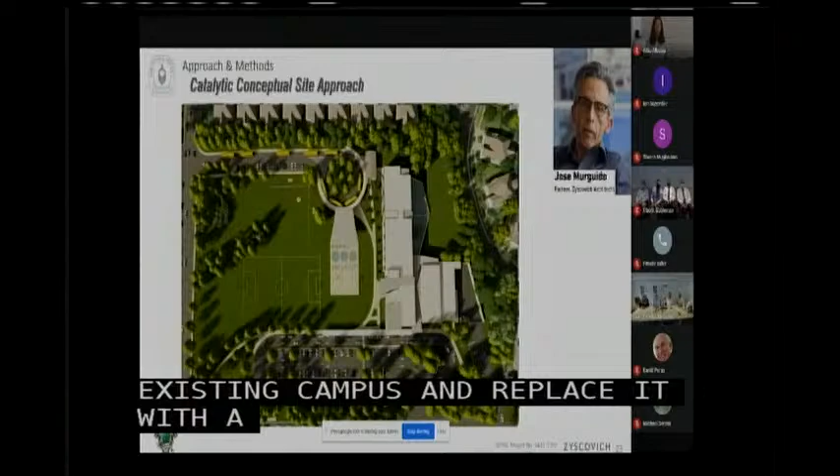The campus would generally be ongoing with minimal disruption in that. And then we would basically demolish the existing campus and replace it with a park. We would bring the park back to Grove Park. And this is how the building would sit on that campus.

Since it is a compact 2-story building, there would be an administration piece in the middle, that pink area here. Let me move this over here. I really miss my pointer.

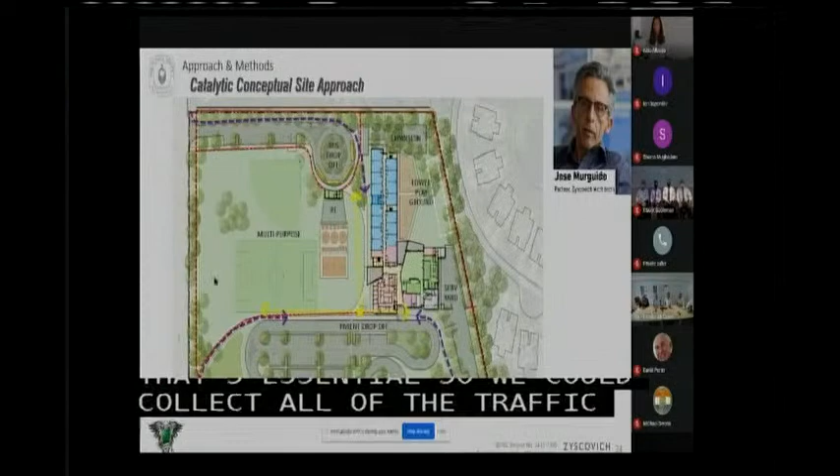What we're showing here in these purple lines is how students would access the site. It also allows us to stand in one particular place and visually supervise all bus and drop-off traffic. The parent drop-off is extensive in this solution - it's 3 times the usual, over 2,400 linear feet. So that's essential so we could collect all of the traffic within the site and minimize the burden onto Military.

And the same is true for the buses. We have over 15 buses we get in here, which eliminates the need of having to make any improvements, and we bring all of the buses on site. A signature entrance there. The PE shelter is located strategically in the center, and the kindergarten play is on the east side of the campus.

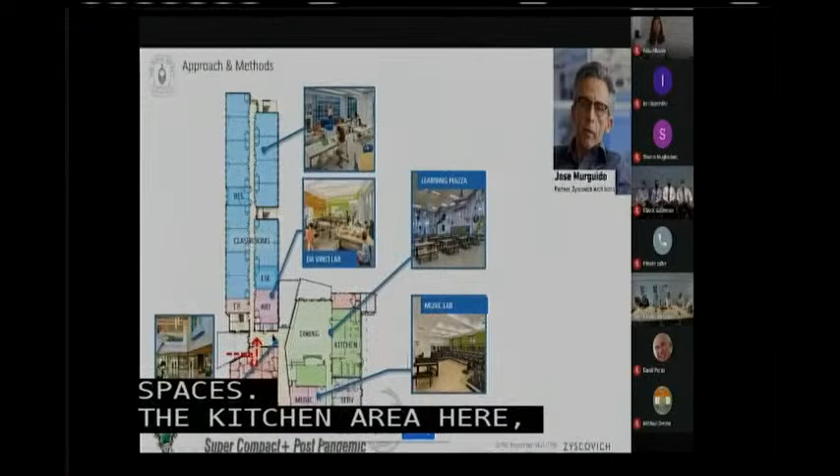The building is designed with a secure entrance in here, so it's a funnel entry. Then beyond that, a welcoming center, and it has the whole assortment of signature type spaces. The kitchen area here, dining, music, and serving area here - a very, very simple supervision. Media, the admin area here with a simple corridor that allows you to get into the classroom spaces.

And the 2-story is a very, very simple building that stacks on top of it, but it does have a signature media center, which is important, and a signature technology and tech lab and science lab on the 2nd floor. So this knuckle is an important component. All of the classrooms are designed 21st century with flexible furniture and natural lighting.

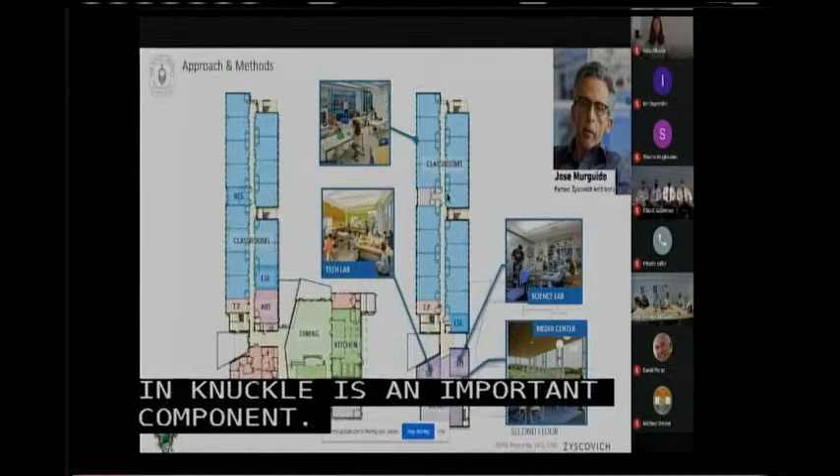You can see how the buses would be able to come in, with ample queuing on site, minimizing the impact. The PE shelter is in this area. We're also keeping the existing one because it's really out of the way.

And then there is an exciting new face to the building to create a transformation, recognizing the IB and the wellness program that is in the building.

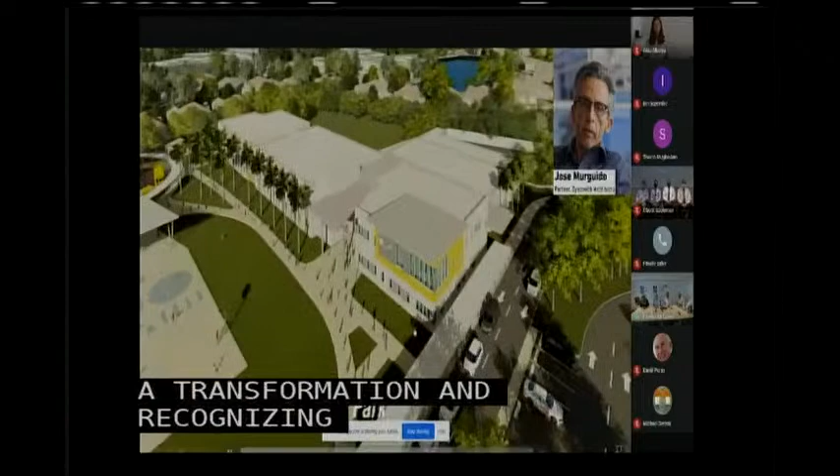You can see the kindergarten play area in the back. Here's our expansion and portable area here and the service yard, and plenty of buffering to our neighbors to the north and east.

So that gives you kind of a nice little snapshot of what we're thinking.

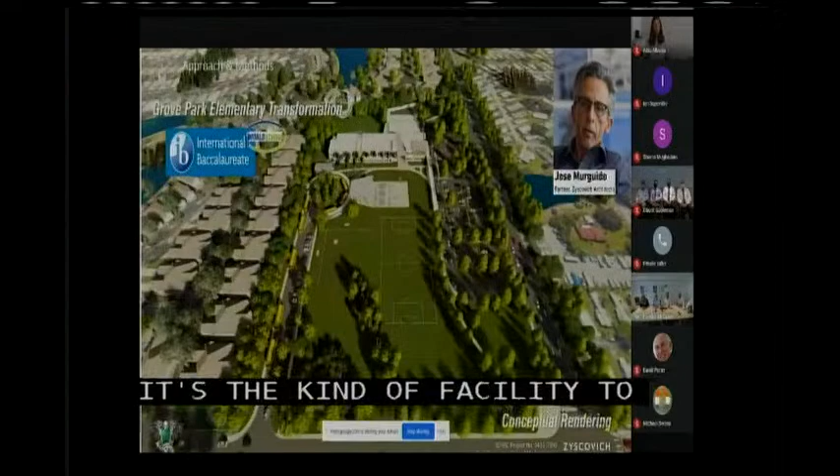It'll be an International Baccalaureate World School, a transformation, and a far cry from what was there - the kind of facility to really reflect the wonderful things that are going on in the school at this time. That's kind of the signature shot of the building.

So as we looked at the two approaches, the significant difference is that whatever we were spending on the portables and in those phases, we're now bringing into the building. So we believe we can take the construction schedule from 24 months to 14 months. Mike is going to get into a little more detail on that, but the bottom line is we're going to be saving a ton of money with this move, we believe.

And speaking of saving money, we're going to save time and money. So the idea here is also recognizing the world that we're living in. Apologies, let me take off my mask so you can hear me a little better.

Recognizing the conditions of where we're at in the overall economy, the various pieces going on in the world is a very important factor in where things are going with inflation and construction costs and so forth. We're seeing that most significantly right now.

Two elementary schools we just bid and went to the board and were approved in Polk County last week, at $220 a square foot. We have a current pulse on the elementary school funding market and that scale of project. We're seeing those things happening now as far as the softening of the market.

We need to take advantage of that. You need to take advantage of that. And that's why we believe our team is particularly set up to act now.

We looked at your schedule and the 23 school year opening and so forth, and we recognized there's a lot of phases there, a lot of complexity in that factor. That all adds to dollars, no matter which way you look at it.

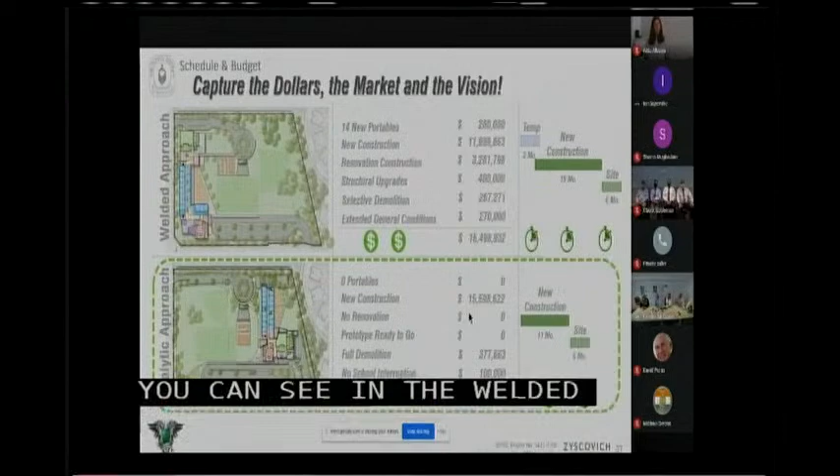Thank you. The structural upgrades that Jose spoke about earlier that we know are going to be required in those existing buildings, those are pre-Andrew buildings, pre-change to the building codes. We know there's going to be significant changes there, and we'd love to answer any questions you have on that piece. But within that project and option, we are at or below budget, and we are below the construction timeline.

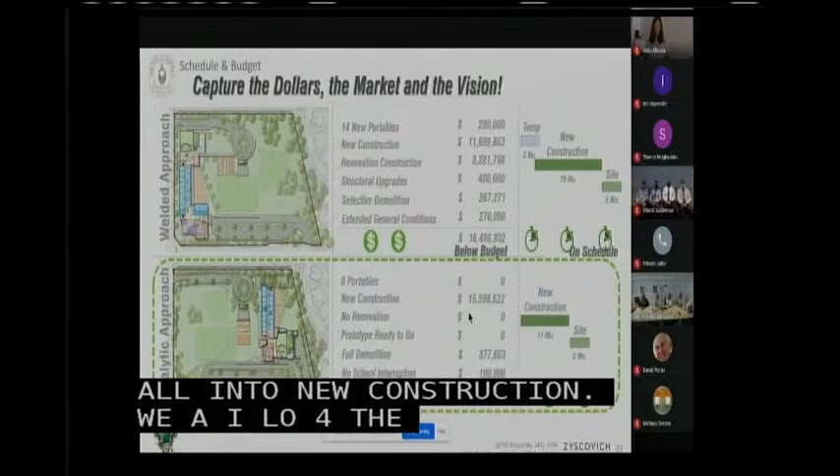On the catalytic move, we have zero portables. We're putting it all into new construction. We allow for the demolition, and there's minimal to no school disruption, which allows for the interesting things going on there to happen. With that piece, we are below the funding budget allowed, and we exceed the criteria for all of those items. We have a long history with you as a school district constructing buildings that are easy to build, simple to operate, and have low energy costs. Hope Centennial is right there at one of the cheapest for you all to operate energy-wise in the entire district, and we continued that with Galaxy.

All of these projects were done with CM at risk in an expedited fashion, and as I said before, energy efficient, low maintenance, and easy to build.

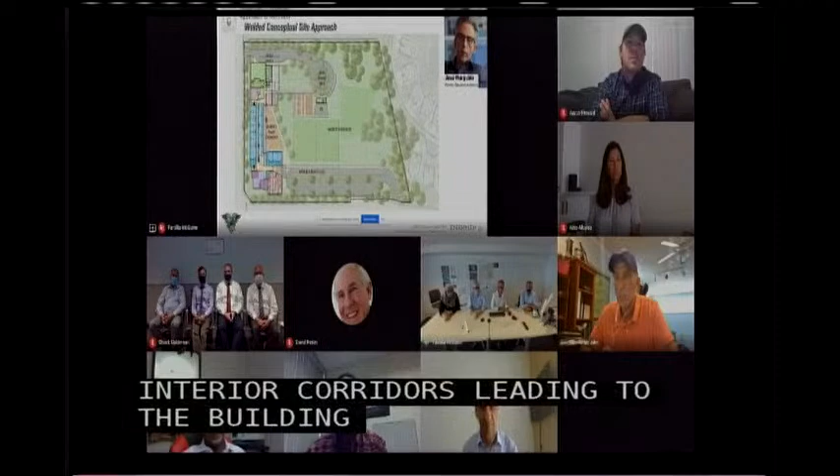But the way it works is we would actually be welding, physically connecting these buildings together, and get rid of the porosity and the safety problem you have with circulation on the outside. So the building would be introverted, with interior corridors leading through the whole building. We have an exterior play space, or learning activity area, off the kindergarten areas here, but circulation to all classrooms is internalized. We take the media center, and the media centers have been redesigned and reprogrammed because of the advent of technology.

So we put that on the corner where it should be and celebrate it, helping rebrand the school. And then we take the media center you currently have and use it basically as back-of-house space, providing our kitchen in this location here, and our dining facility in this area. We can get natural lighting, the stage, music, the green rooms back here. That's your art lab there.

And then the second floor just stacks right on top of it, comes right up like this. So that's generally what we plan: basically two remodelings in this area, and then a bar building that's welded and internalizes all of the circulation. So we would basically be gutting both of these buildings.

Okay, great. Thanks. Yeah, sure. I like that, thank you. Sure, thanks Glenn. Patrick? Yes.

Jose, how much SBE participation do you plan to achieve on this project? Okay.

We've got this slide right here. We have... 35%, so we're 20% over the minimum on this. And as I mentioned, we're still working with the same people that we've been supporting for all of these years. So we're going to be a little over 35%.

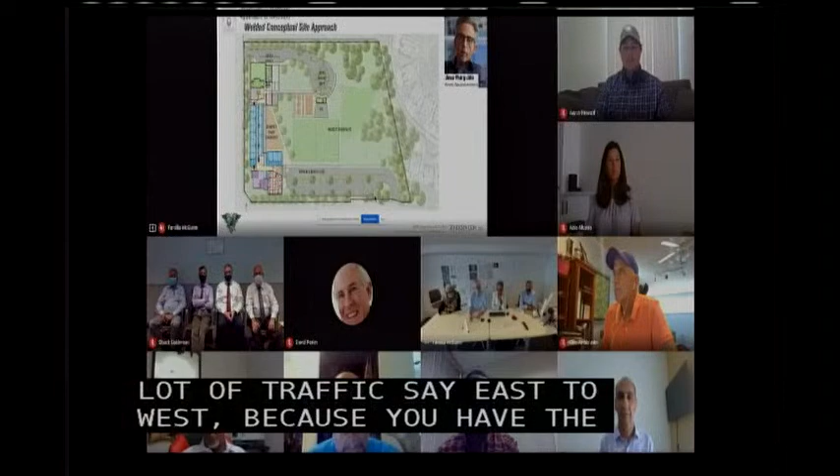With regards to the welded concept, I realize that most of the students attending the school live west and southwest of the site. Moving the vehicular access onto Investment Lane, even though there's not a lot of traffic going east to west, because you have the ingress-egress drive aisle so close to the project border, do you anticipate any sort of smaller right turn lane at all?

I'm not sure what the traffic count will be. I know the students are supposed to be about 650, and it's supposed to increase a bit. We talked quite a bit about that, and Gene DeFonte's on the line as well. I believe we have the right of way along this area here to do it. But as you point out, the lion's share of the traffic is really coming from the southwest. So most likely the turn lane would have to be an expanded or maybe a dual left turn coming into the site here. As you go east on Investment, you've got to go over 95 just to get back, so it's not a traffic-friendly location unless you're going to the beach or something. So there is a little right of way here, but due to the way the intended boundaries are set up now, we don't think you're going to require it.

The other thing, if I could offer this, Mike, is that while it extends the turning in, we have more queue than the previous layout had, so we think we can accommodate everybody on campus as well. But it also extends the queue heading back out of the site and then back to Military, as they're all looking to get to that light, so they can either turn left and go back down to Blue Heron or go up to north. So we think there's a positive by pushing it back further. Obviously, we'd have to meet with you, the planners, the team, and so forth to vet that out. But as Jose pointed out, the community to our east has no access down to Investment Lane, and the width of the right-of-way seems to be appropriate to get there. So I think we have a lot of opportunity to talk about along that access point.

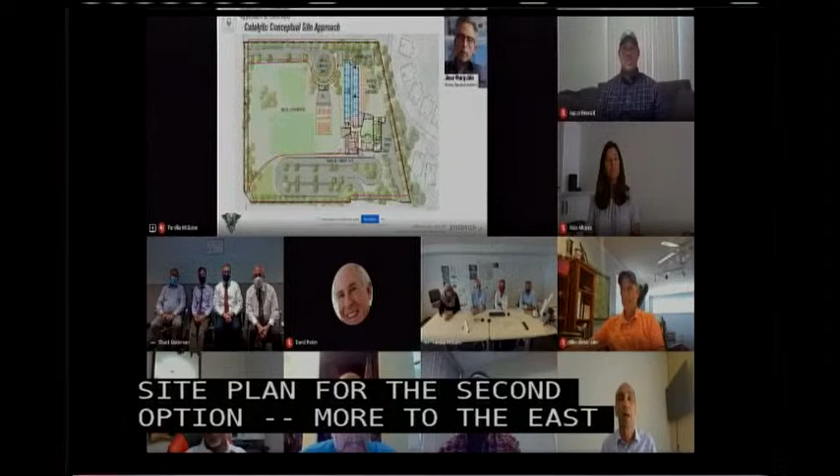Right, and this chiller would have an acoustic package, and it would be in this vicinity, in this area over here. Right, so that's something that, as you know, we'll be monitoring. We'll look at the receiving property line and manage the decibels there. But I think the savings we have in the utilization of the site and the lack of portables makes

the acoustic package seem like a very wise ROI for the benefit that you get. So you're absolutely right, we'll have to work well with the neighbors. This is kind of similar — I don't know if you remember when we did Congress, we had a similar situation where we were able to provide an acoustic package to everyone's satisfaction. Congress Middle, that is. Yeah.